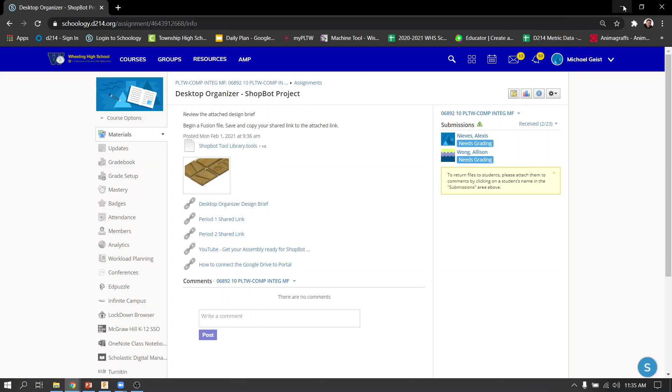Download from the assignment on your iPad. Go to the desktop organizer, download ShopBot Tool Library. It's right here, .tools. Put it on your iPad in your downloads, then open up that Manage Tool Library, right-click on Local, import the library, and from your Google Drive, wherever you saved it, you're going to load it.

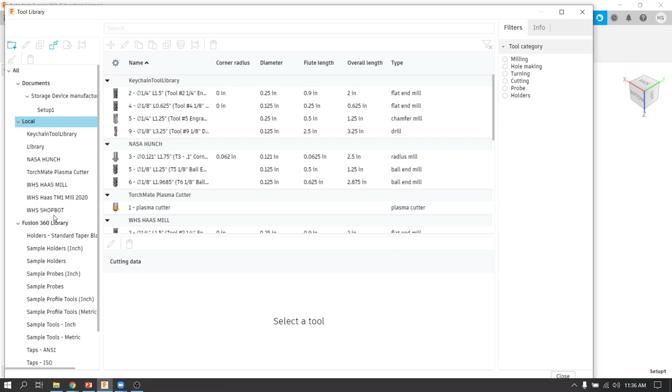Once you load it, you'll see it here as WHS ShopBot. It's only one tool, a 1/4 inch flat ShopBot tool. Make sure you do that first. Then, we're only going to have 2 operations for this. So here we go.

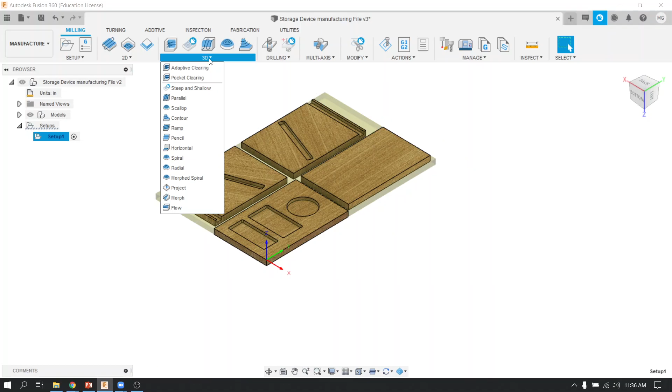First operation, go to 3D. Then select up top, not adaptive clearing. Do not pick adaptive clearing, or I'll be here all day waiting for your part to finish. You're going to do pocket clearing. It's a much more aggressive, faster way of removing material when working with a softer material like wood. So we're going to pick that.

Remember all these tabs are the same as they've been when we were doing the metal on the keychain. The first tab is your tool, so go ahead and select. It's going to open up our library. Go to ShopBot and pick the only tool that's there, which is the 1/4 inch.

Don't mess with any of these because these are all of our feeds and speeds. I already set those for you. Go to Geometry, change Machining Boundary to Selection.

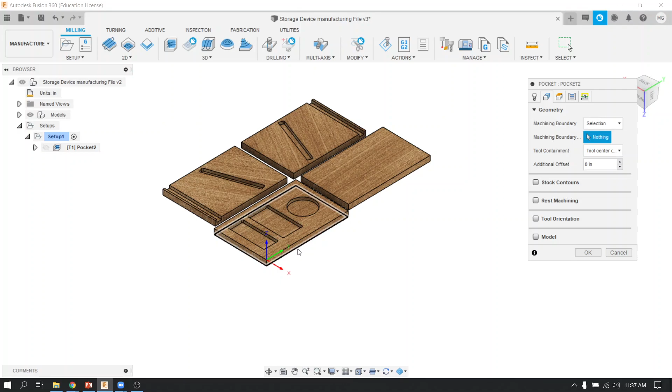Now we've got to define the perimeter for Fusion to look for all of these pockets that we have in here. I like to pick the bottom edge because that's the easiest way to define the perimeters. See all the green perimeters? Now it's going to look for all these pockets, like a fence. Think of it as a fence for a yard - you're saying, hey, look inside all of these different yards. So that's kind of what this is trying to accomplish.

If I go to heights, I'm going to leave those alone because this operation automatically looks for the bottom of the model, like the bottom of this floor and this floor and this floor. So I'm going to leave that alone.

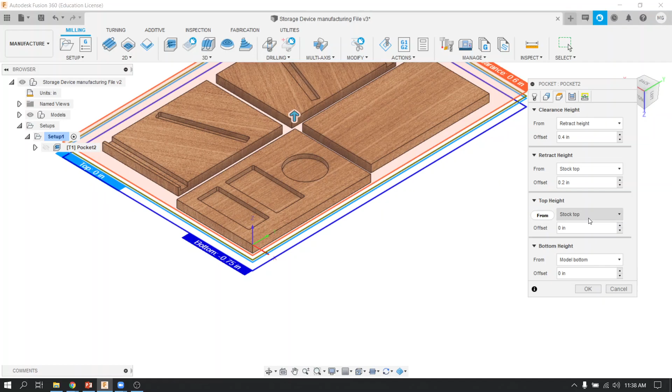The 4th tab, I do have to make 2 changes. One is how deep the tool is allowed to go - I'm going to say 0.25. The next change I'm going to make is to turn off stock to leave because I want it to go all the way to these finished surfaces. I don't want it to leave any material.

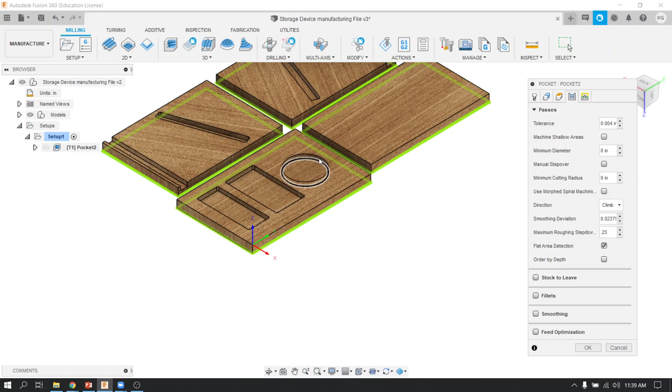My final linking tab, I'm going to change my ramp to a plunge because I want it to plunge in. I don't have to worry about the helix because this is a soft material. I'm not worried about breaking the tool in the same sense that I would if it was a hard, dense material like metal or steel.

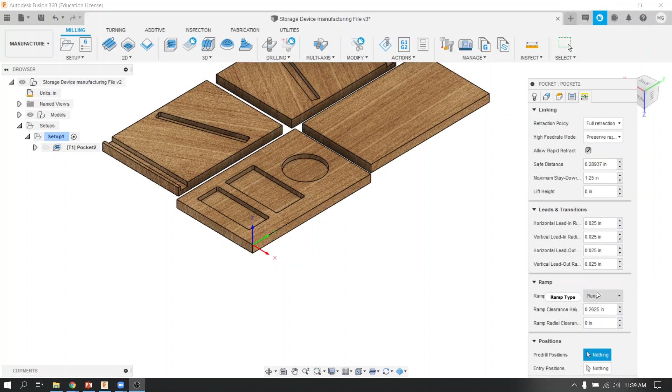So I think that should be it for this pocket operation. I'm going to hit OK, and then we can watch it preview. You will get a warning, and it's only because we're plunging, and generally Fusion doesn't like plunging because it worries about the tool breaking, but we're in soft material, so that's okay.

The final operation here that we're going to do is a contour, which is going to cut out these pieces from the solid piece. So we're going to go to 2D, and go down to contour.

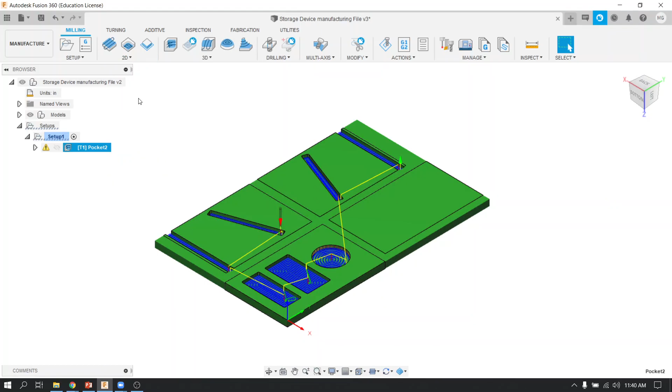Same 5 tabs. We can leave this alone - it already is going to select the previous tool. I'm going to go to Geometry, and again pick those 4. You may be more or less for you depending on how many pieces, but I'm going to pick the bottom edge.

You might want to look at it from a top view to make sure that these red arrows are on the outside of your blue selection. If it is not, click the arrow and jump it to the outside.

Third tab, I do need to make a change because it says I want the tool to start at the stock top and end at the stock bottom. But that's not far enough because I got to really make sure it's going to cut all the way through, so I'm going to offset an additional negative 0.05. Make sure those numbers are correct.

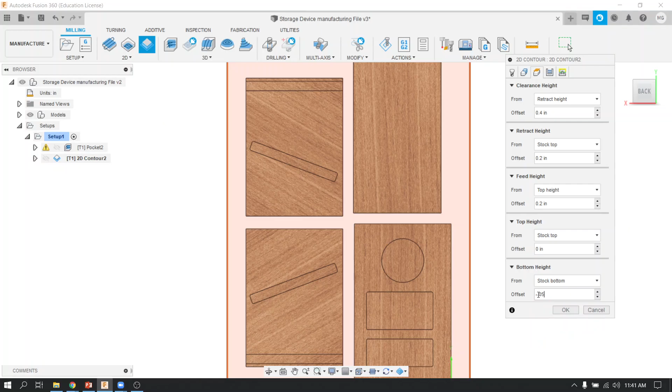The fourth tab, I want to not go down in one single cut. I'm going to go down in multiple depths by 0.25. And then my final linking is going to ramp so that it goes down at an angle of 2 degrees.

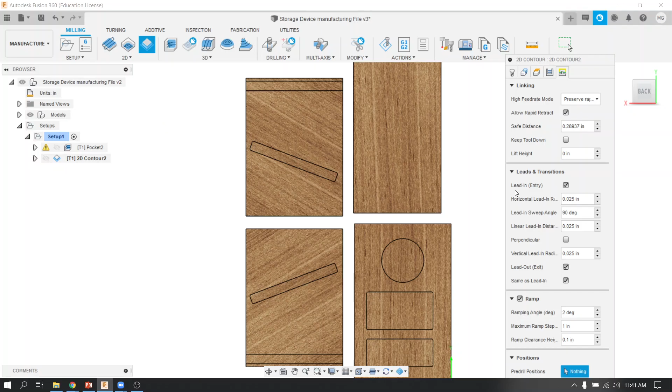I can minimize these arrows so I can see my OK if I can't see it on my screen. Sometimes it goes down too far. And then I'm going to hit OK.

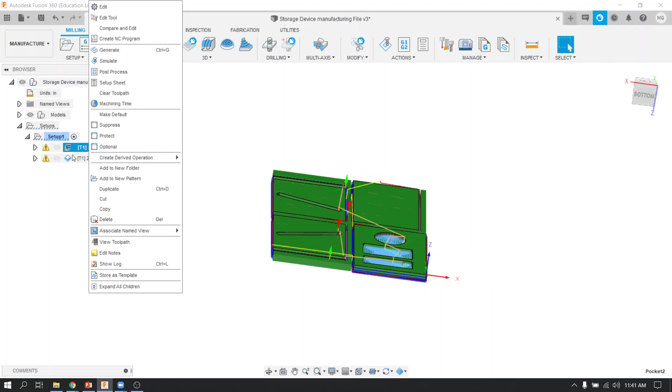You'll see a preview in red lines and blue lines of that toolpath. If I want to highlight, holding Shift both of these toolpaths, and then right click and simulate, I could do that. I can press play down here and I can watch it cut. I'll slide through and you can see all of those previewed paths.